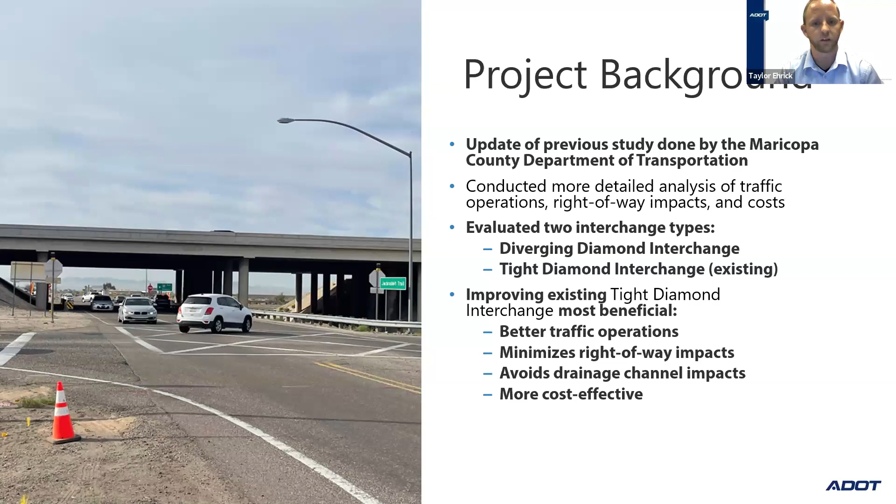The draft recommended alternative is presented in the draft design concept report, which is available for public comment on ADOT's project website. There are a number of different ways to provide comments, which will be discussed later in this presentation.

The draft recommended alternative includes the following improvements: adding traffic signals at the interchange to control all traffic movements, providing more turn lanes on Jackrabbit Trail, as well as the I-10 off-ramps to improve traffic flow entering and exiting I-10, widening Jackrabbit Trail to 3 lanes in each direction, and adding a raised median, bike lanes, sidewalk, curb, gutter, and streetlights.

As part of the widening, the road will be shifted to the east slightly, approaching the traffic interchange, to avoid the large drainage channel west of Jackrabbit Trail. The draft recommended alternative includes removing and reconstructing the I-10 bridges over Jackrabbit Trail, which will allow for the widening of Jackrabbit Trail to 3 lanes in each direction. The next several slides will show these proposed improvements in more detail.

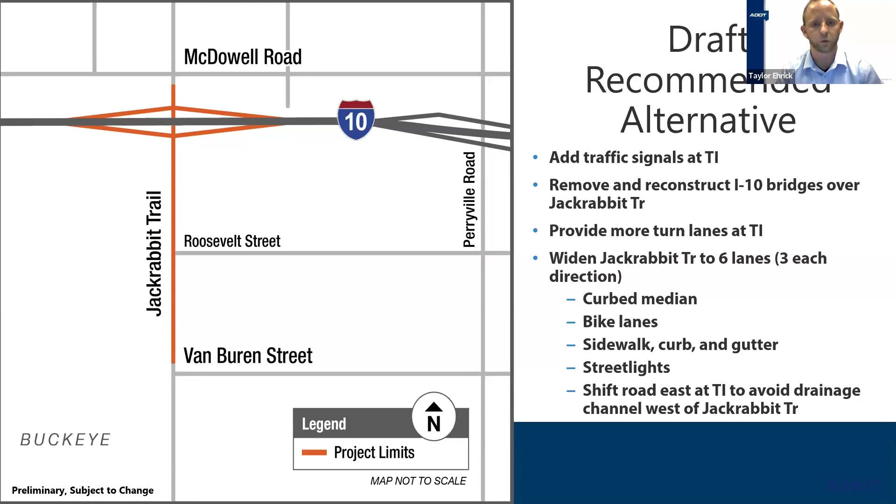At the northern project limits near McDowell Road, the ADOT project improvements will need to be coordinated with the City of Buckeye's widening projects along McDowell Road and Jackrabbit Trail north of McDowell Road. The city's improvements are expected to be completed prior to the Jackrabbit Trail traffic interchange project.

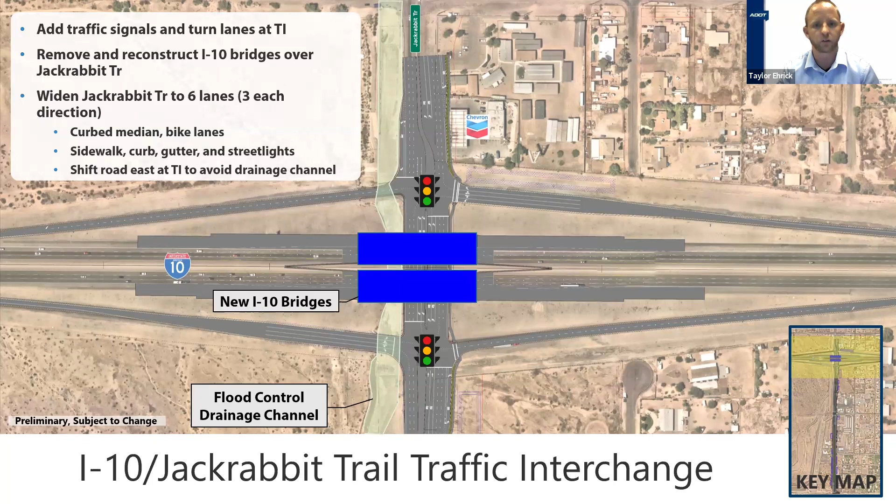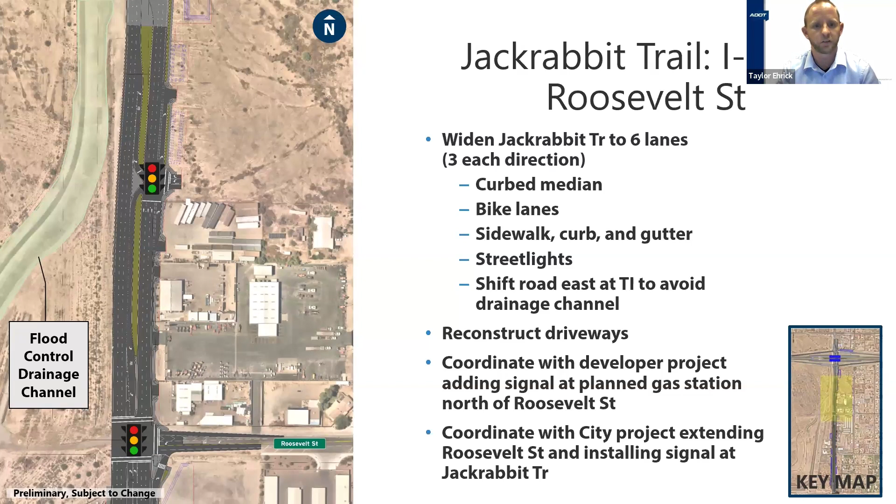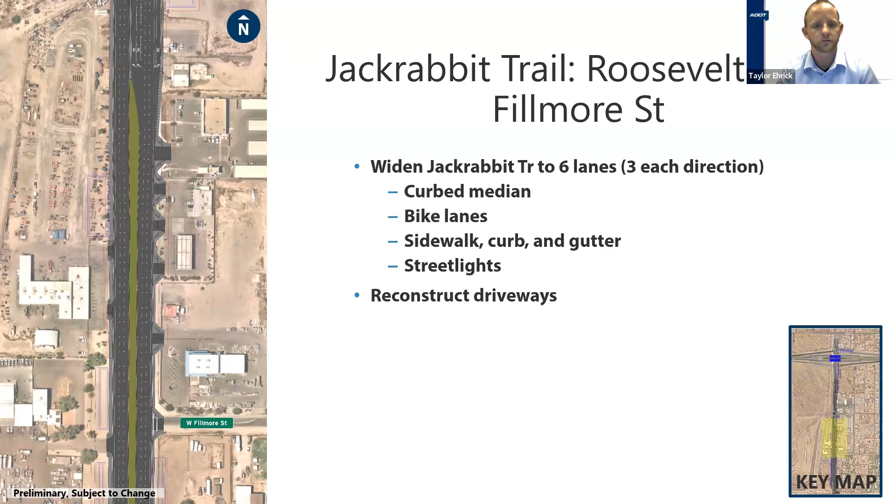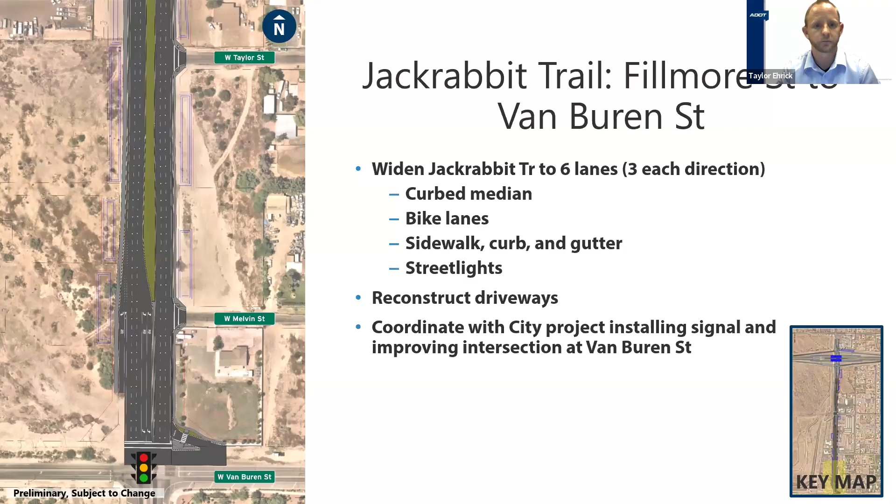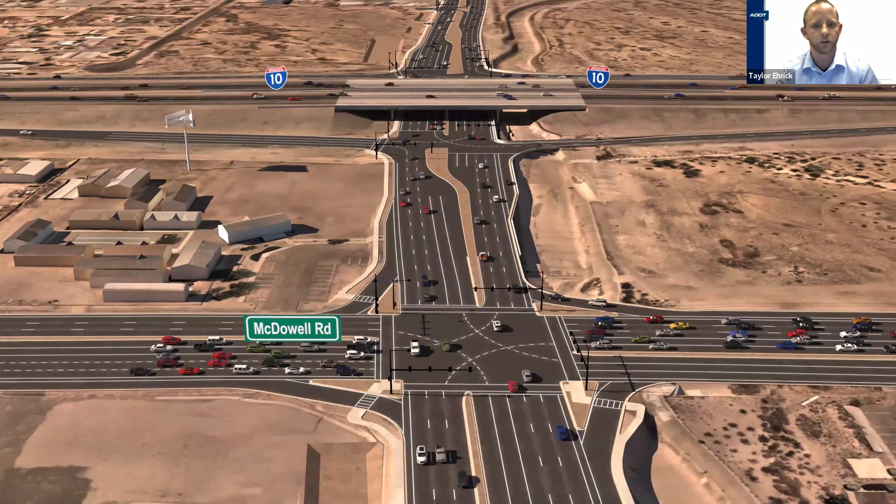The following video will provide an aerial overview of the project improvements discussed on the previous slides. The current view is looking south along Jackrabbit Trail from McDowell Road. Over the next minute, you'll see a 360-degree overview of the proposed traffic interchange.

The reconstructed traffic interchange will provide 3 through lanes in each direction along Jackrabbit Trail, as well as dual left turn lanes and dedicated right turn lanes from Jackrabbit Trail onto Interstate 10. The Interstate 10 ramps will also be widened to provide additional turn lanes for vehicles entering and exiting Interstate 10. New traffic signals will be installed at the traffic interchange to improve traffic operations.

The new bridges will be constructed to span the widened Jackrabbit Trail and protect the existing flood control channel in place. The new bridges will be wider than the existing bridges to accommodate future lane expansions along I-10. We will now take a brief pause as the video does a 360 around the interchange.

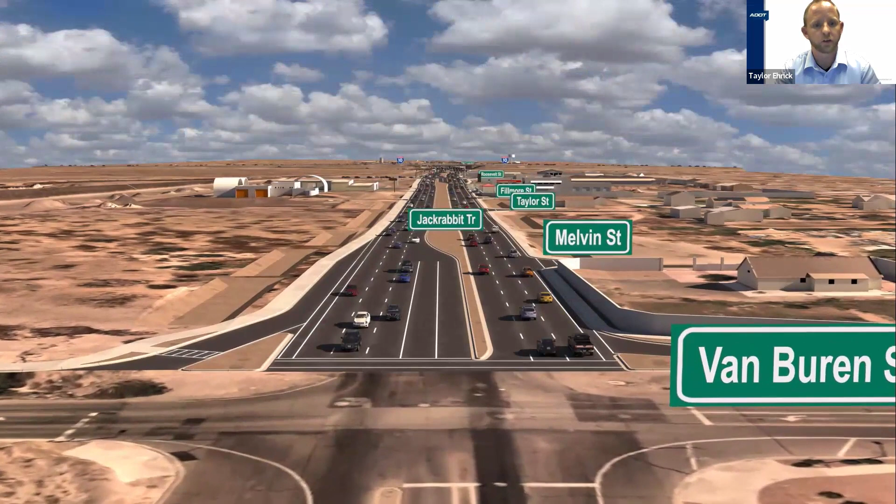Now we will drive northbound through the project corridor, starting at Van Buren Street at the south end of the project. As mentioned, Jackrabbit Trail will widen to 3 lanes in each direction with a raised median. New signals with additional turn lanes will be provided at Van Buren Street, Roosevelt Street, and the proposed gas station north of Roosevelt Street. Drainage basins will be installed along the roadway to capture stormwater runoff from the widened roadway. Existing driveway connections will be reconstructed to tie into the widened roadway. New sidewalks and bike lanes will be provided throughout the corridor.

As we approach the interchange, the roadway shifts to the east to protect the flood control channel on the west side of Jackrabbit Trail. As shown, McDowell Road is located very close to the I-10 Jackrabbit Trail traffic interchange. These draft recommended improvements will help traffic flow better and safer along Jackrabbit Trail between the closely spaced intersections of I-10 and McDowell Road. The McDowell Road intersection will be improved as part of the City of Buckeye projects noted earlier in the presentation.

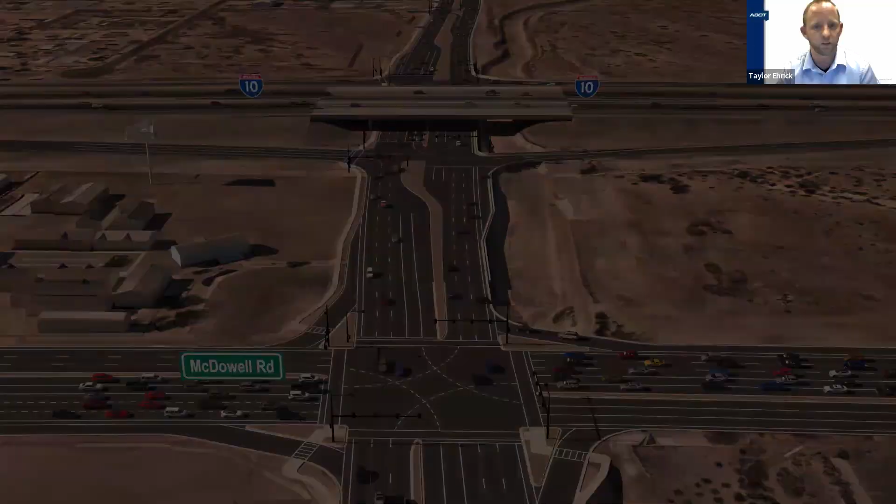Acquisition of right-of-way from adjacent properties is needed to widen Jackrabbit Trail, shift the roadway to the east, provide drainage retention basins, and reconstruct driveways to tie into the widened Jackrabbit Trail.

It is anticipated that 28 parcels of varying usage types will have right-of-way impacts, with 27 partial right-of-way acquisitions shown in red on the map, and one total right-of-way acquisition, shown in green on the map.

The next several slides will show the preliminary anticipated right-of-way impacts in more detail. It's important to note that right-of-way impacts shown are still preliminary at this very early stage of the project and are subject to change during final design.

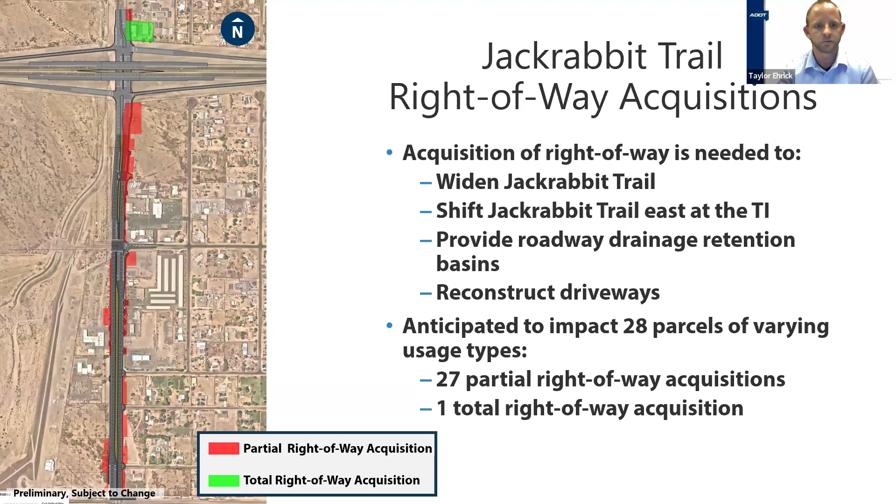This slide shows the preliminary anticipated right-of-way impacts at the I-10 Jackrabbit Trail traffic interchange, which is the portion of the project limits shown in yellow in the key map at the bottom right. Acquisition of right-of-way is needed to widen Jackrabbit Trail, shift Jackrabbit Trail east at the TI, and provide roadway drainage retention basins.

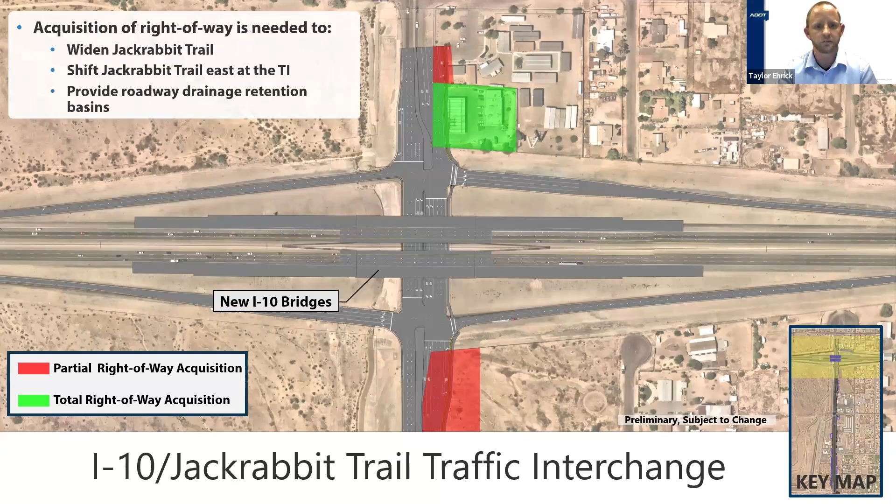This slide shows the preliminary anticipated right-of-way impacts along Jackrabbit Trail from south of I-10 Jackrabbit Trail traffic interchange to Roosevelt Street, which is the portion of the project limits shown in yellow in the key map at the bottom right. Acquisition of right-of-way is needed to widen Jackrabbit Trail, shift Jackrabbit Trail east at the TI, provide roadway drainage retention basins, and reconstruct driveways.

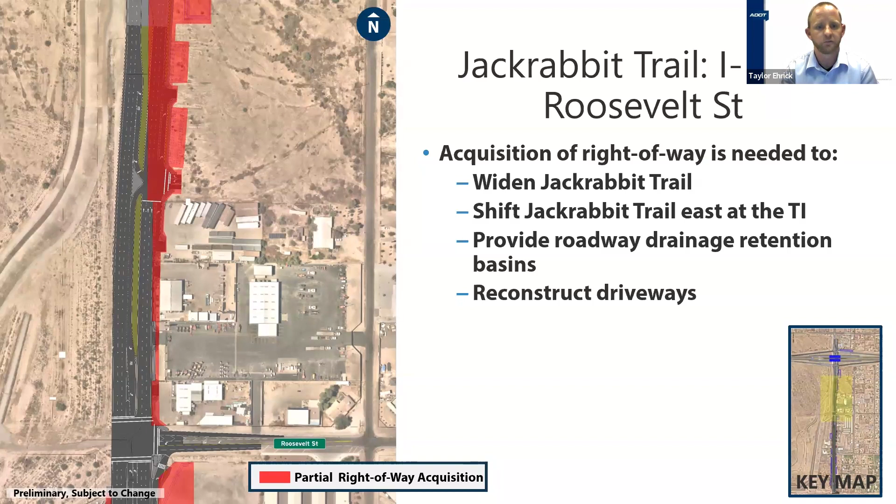This slide shows the preliminary anticipated right-of-way impacts along Jackrabbit Trail from Roosevelt Street to Fillmore Street, which is the portion of the project limits shown in yellow in the key map at the bottom right. Acquisition of right-of-way is needed to widen Jackrabbit Trail, provide drainage retention basins, and reconstruct driveways.

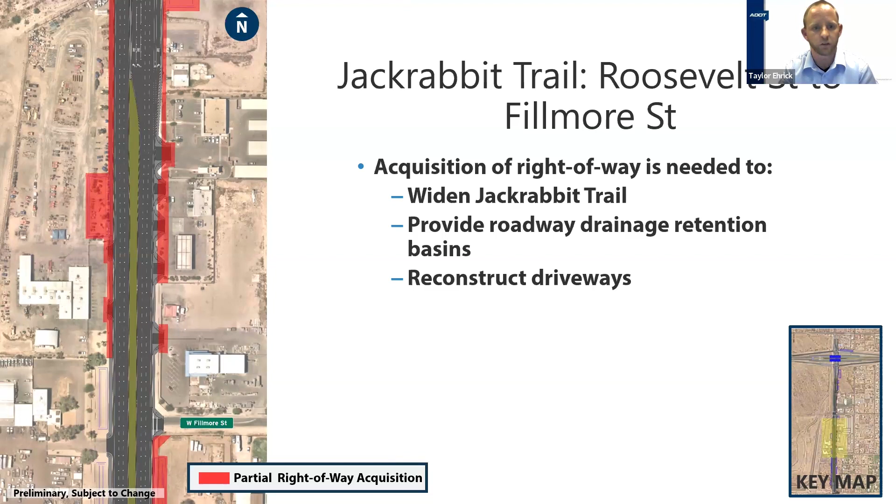This slide shows the preliminary anticipated right-of-way impacts along Jackrabbit Trail from south of Fillmore Street to Van Buren Street, which is the portion of the project limits shown in yellow in the key map at the bottom right. Acquisition of right-of-way is needed to widen Jackrabbit Trail, provide roadway retention basins, and reconstruct driveways.

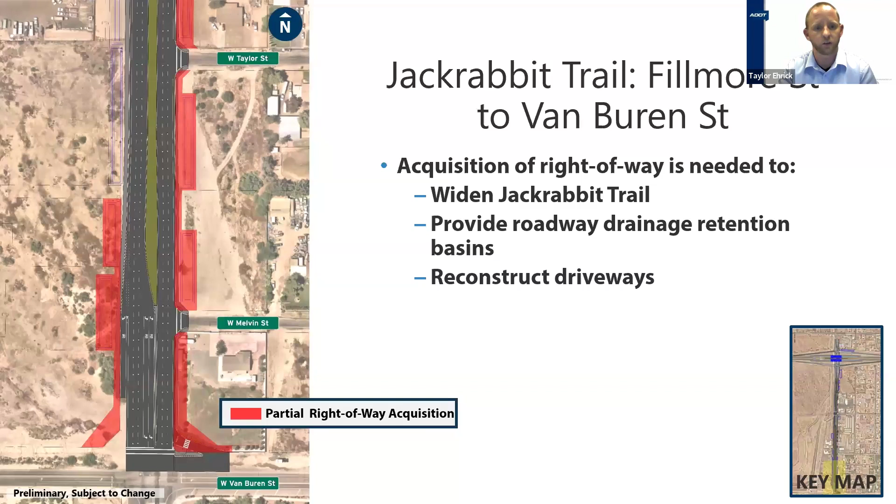Once the design concept report is finalized and funding for design is in place, the project will move into the final design phase. During final design, potential right-of-way impacts and access changes that were preliminarily identified will be further refined and finalized. Affected property owners will then be contacted to initiate the right-of-way acquisition process.

All acquisitions and relocations will be performed in accordance with the Uniform Relocation Assistance and Real Property Acquisition Policies Act of 1970. If you have questions about the right-of-way process, please contact Stacy McKenzie, ADOT Right-of-Way Project Coordinator, at smckenzie@azdot.gov or 602-712-7167.

A noise analysis was performed for this project as part of the environmental analysis, following federal and ADOT regulations and policies. Anticipated noise levels within the project limits warrant consideration of noise abatement measures. No final mitigation recommendations are being made at this time, as proposed noise abatement will be reevaluated in the near future with a new widening project on I-10 between State Route 85 and Citrus Road that includes this project limits.

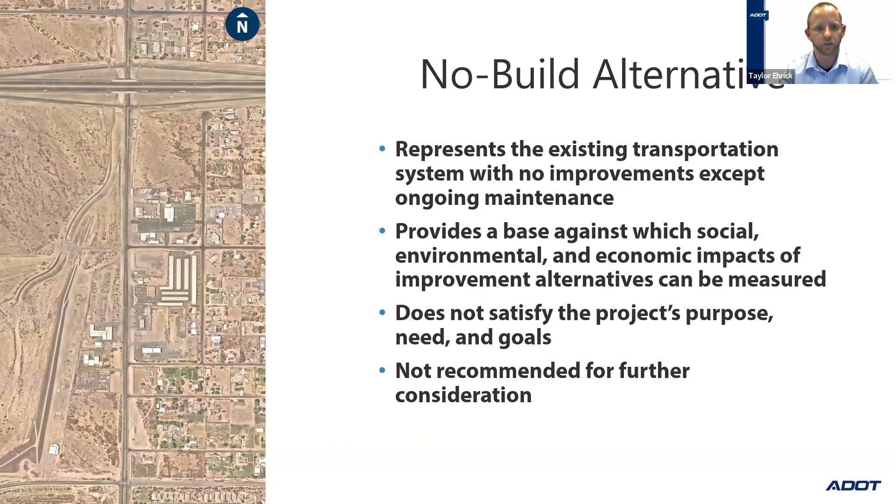ADOT, in coordination with the City of Buckeye and MAG, will then finalize the recommended alternative. The recommended alternative selection process, as well as the input received from the public and stakeholders, will be documented in the final design concept report, which is anticipated to be completed in spring of 2024.

If the recommended alternative, as described tonight, is ultimately selected, then the project is expected to move into the design phase in the summer of 2024, with the design and right-of-way acquisition process anticipated to be complete in spring of 2026.

I-10 Jackrabbit Trail traffic interchange improvements are recommended in MAG's Regional Transportation Plan, but funding for construction has not yet been identified. Funding for construction is anticipated to become available if Proposition 479, the extension of the regional half-cent sales tax for transportation in Maricopa County, passes in the November 2024 election.